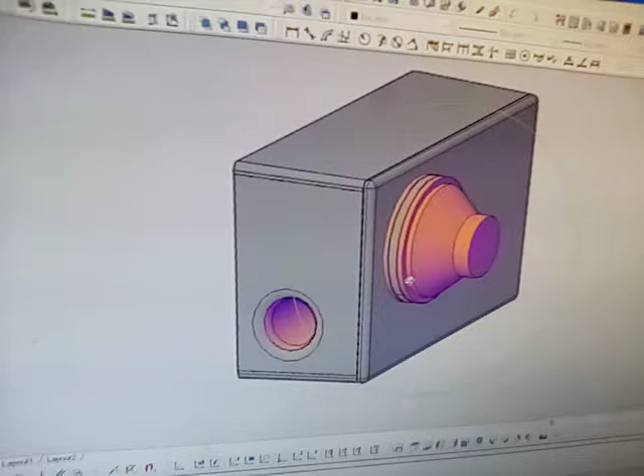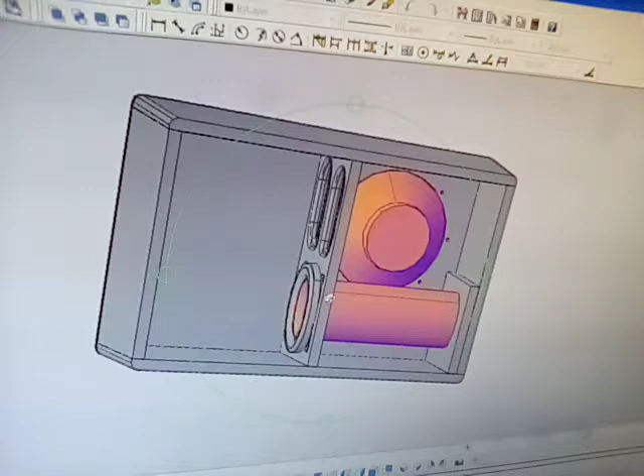So here it is. I've always wanted to build one of these. It's going to be an Isobaric build, a pair of 10-inch woofers, one on the inside, one on the outside. There's a little flange ring in between and a 4-inch port, 14 inches long, that I've supported on the inside, and added an extra ring so I can make a nice chamfer on there, a nice fillet inside and outside. It's also an extra piece there for extra strength. So it should be a strong box.

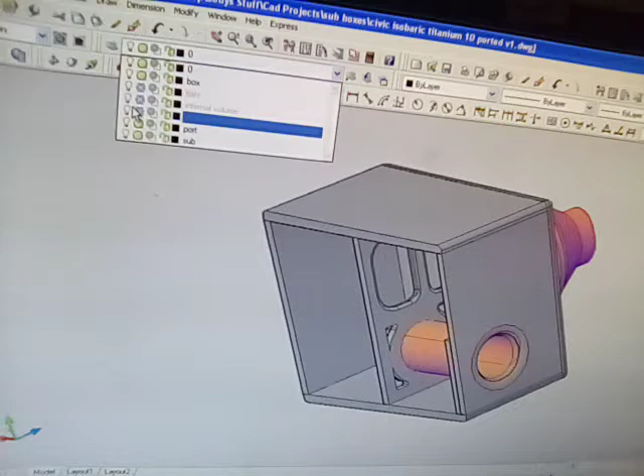Here's what it looks like with the lid back on it. So when it's all done, it's gonna look like that. One sub sticking out, one inside. Nice big port. Okay, all 3/4 inch MDF.

So here is some WinISD. I modeled a few systems here. Let's see, this first one here, that's a 0.75 cubic foot sealed box. Pretty boring. Then if we do a 1.5 cubic foot vented enclosure, that fills a lot more space under the graph there. That's a much more impressive box.

And then here is our Isobaric. Same thing with a little bit more in there. Yeah, I just kind of always wanted to build one. It's probably going to be a little bit boomy in there.

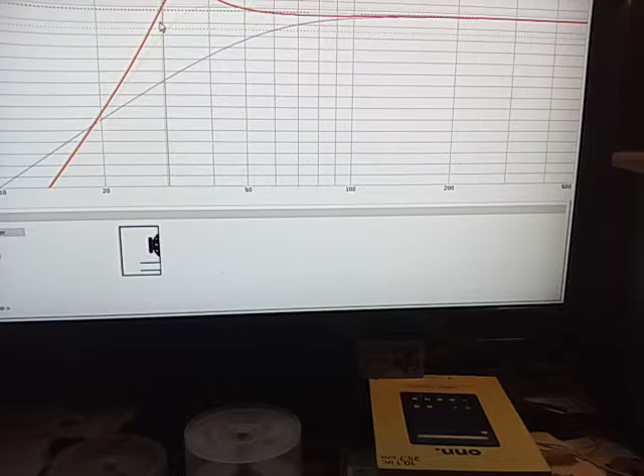That peaks at about 34 hertz. Should play down to about 27. Yeah, should be a nice little box. 27 hertz sitting down there, peaks at about 34. So we'll try one of these.

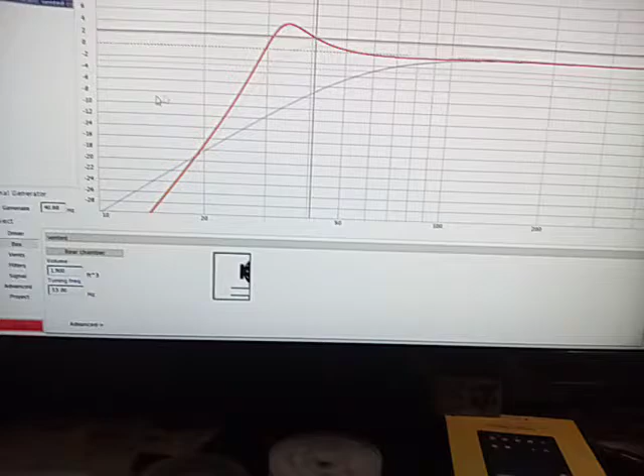Isobaric. I'm going to use the Titanium TS104, I'll give you a look at them. So I've already built this box, it's out in the garage. So let's go have a look now, give you a look at this box.

So I used some old MDF that's been kicking around the shop forever. You can see in there, nice big strong panel, big port in there. Got my usual Def Pops and Son logo, Def Pops and Son sub chambers.

So this thing, that's the orientation it's going to sit in the trunk. I've already sanded it and filleted it and got it all in pretty nice shape. Put it out, okay. So, one sub. It's in there nice. And then got a ring, and then I already pre-drilled it, all the holes lined up.

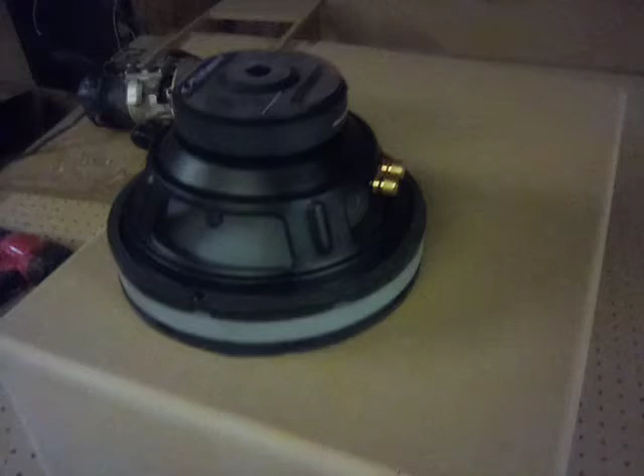So these subs, I found at what we call the Wassa Walmart, which is a dump out by Wassa Lake where people drop things off to be salvaged and whatnot. And they're just laying in the dirt beside the garbage bin, matching set of junky subwoofers. So I picked them up, thought this would be a perfect project for that. So let's see if we can get some decent sound out of some junky freebie subwoofers, some old MDF that I've had sitting here for 12 plus years. That sewer pipe's been here for 15 years. So good recycle project, I'm kind of excited to finish it.

So I'll wire it, bolt it together, and we'll give you a little review after we get it running. That's all, thanks for watching.